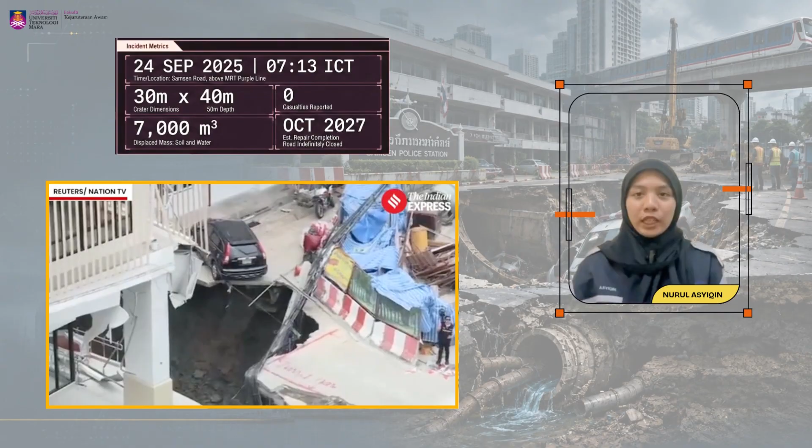Good morning everyone. Today I would like to present about a land subsidence that happened near the MRT Purple Line construction area in Bangkok on 24 September 2025.

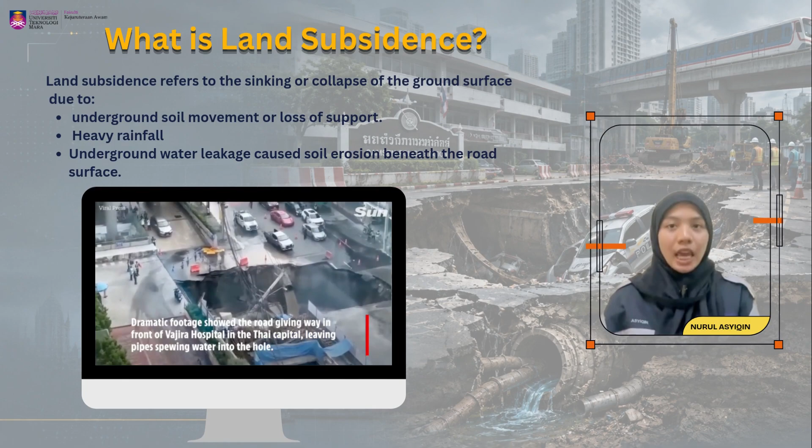Land subsidence refers to the sinking or collapse of the ground surface due to underground soil movement or loss of support. In this case, heavy rainfall and underground water leakage caused soil erosion beneath the road surface.

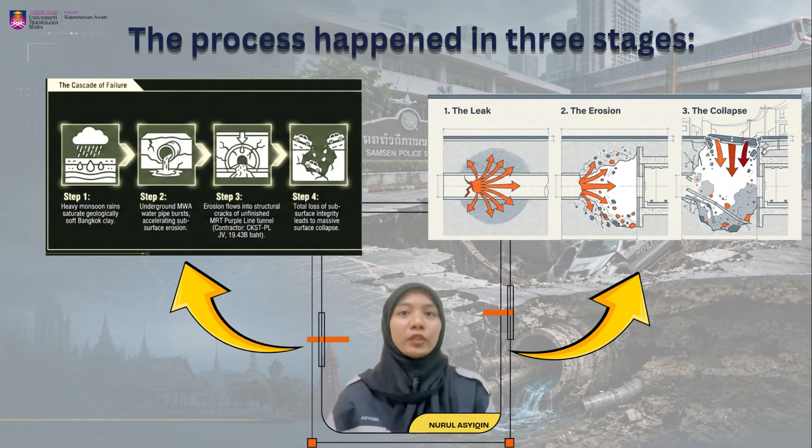This happened in three stages. First, water leaked into the soil. Second, the flowing water slowly washed away soil particles and created an underground void. Finally, the ground could no longer support the load above it, forming a huge sinkhole.

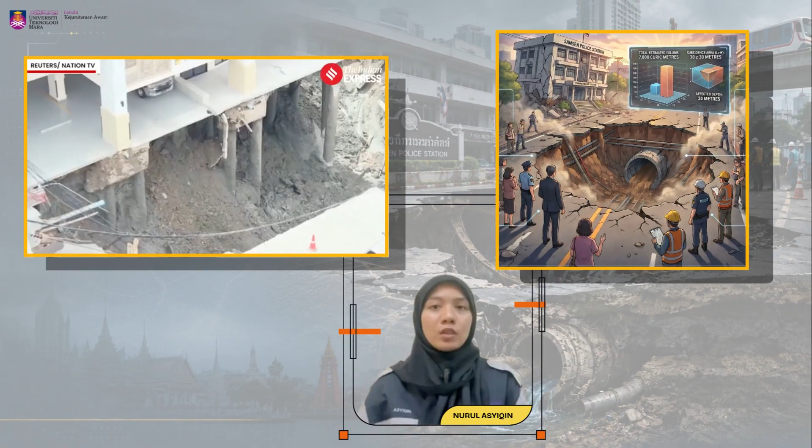The sinkhole was about 30 meters by 40 meters with around 7,000 cubic meters of soil and water, affecting nearby infrastructure including the Samsen Police Station, Vajira Hospital, MRT construction site, nearby roads and utility systems.

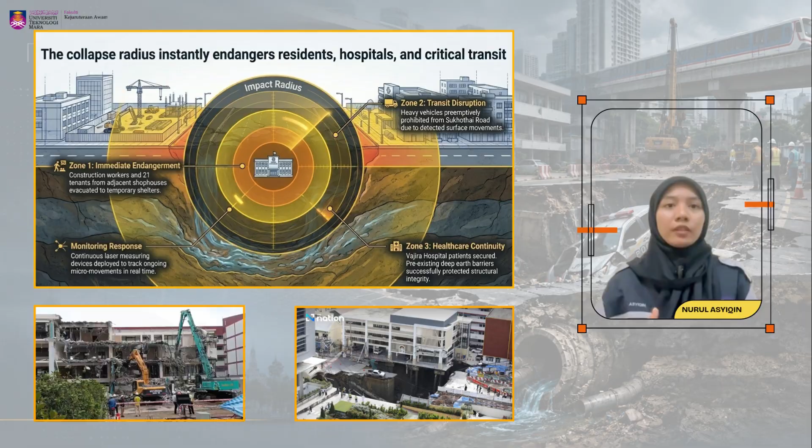Although no casualties were reported, many construction workers, patients and road users were affected indirectly due to the safety risks and road closures. This case shows the importance of proper underground monitoring, drainage systems, and geotechnical investigation to prevent future land subsidence incidents.

I will explain the first major issue related to the land subsidence incident at Samsen Police Station in Bangkok, which is structural instability and infrastructure failure.

The incident created a massive sinkhole measuring approximately 30 by 30 meters and nearly 50 meters deep near the police station and Vajira Hospital. The collapse caused severe damage to roads and underground utilities, police vehicles, and nearby buildings.

Engineers later discovered structural cracks, tilted structures, and damaged foundation piles beneath the police station building. Due to this serious damage, authorities declared the building unsafe and planned for demolition.

This case is considered a complex civil engineering problem because sudden large-scale land subsidence in a dense urban area is difficult to predict and can quickly become dangerous.

The collapse also highlights the challenge of underground construction in weak soil conditions, especially in Bangkok where soft clay soil and groundwater-related subsidence are common issues.

From a safety perspective, the incident endangered numerous residents, road users, hospital patients, and construction workers. Authorities had to close roads, evacuate surrounding areas, and monitor nearby structures to prevent further collapse and injury.

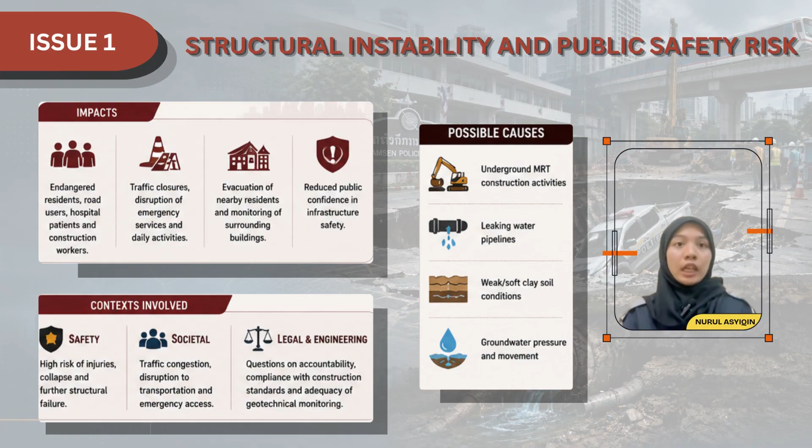From a social perspective, the collapse disrupted transportation, emergency services, and daily public activity in Bangkok. It also raised concerns regarding construction safety, geotechnical monitoring, and whether underground MRT construction activities, leaking pipelines, and groundwater pressure contributed to the failure.

I will explain the second major issue in this case, which is environmental and urban development challenges related to the land subsidence incident at Samsen Police Station in Bangkok.

Investigations suggest that underground MRT construction activities, groundwater pressure, leaking pipelines, and Bangkok's soft clay soil contributed to the subsidence problem. Bangkok already experienced long-term land subsidence due to rapid urbanization and excessive groundwater extraction, making the engineering condition more complex and unstable.

This case demonstrates how large infrastructure projects in weak soil conditions can increase environmental risk if proper geotechnical investigation and monitoring systems are not implemented effectively.

Due to the continuing soil movement, authorities had to carry out emergency stabilization work using sandbags, concrete fillings, and monitoring systems to prevent further collapse and protect nearby infrastructure.

From a health and society perspective, the incident affected nearby communities and hospital operations. Traffic congestion, dust, vibration, noise, and disruption to water and drainage systems caused inconvenience and stress to residents and the public. Some residents also needed temporary relocation for safety reasons.

The incident also raised concerns regarding sustainable urban development in Bangkok. Many people question whether construction projects and underground infrastructure work were properly monitored before the collapse occurred. This situation reduced public confidence in urban planning and infrastructure safety.

Overall, this issue highlights the importance of sustainable urban planning, environmental management, and continuous monitoring during underground construction projects to reduce further risks and ensure safer urban development.

Because the ground keeps sinking, repairs and upgrades are needed again and again, which drives up maintenance costs. This creates long-term economic burdens for the government, business, and communities.

For example, business activities and transport systems get disrupted, infrastructure lifespan becomes shorter, and property values drop. Also, flooding makes the damage worse, affecting public safety, health, and even cultural areas.

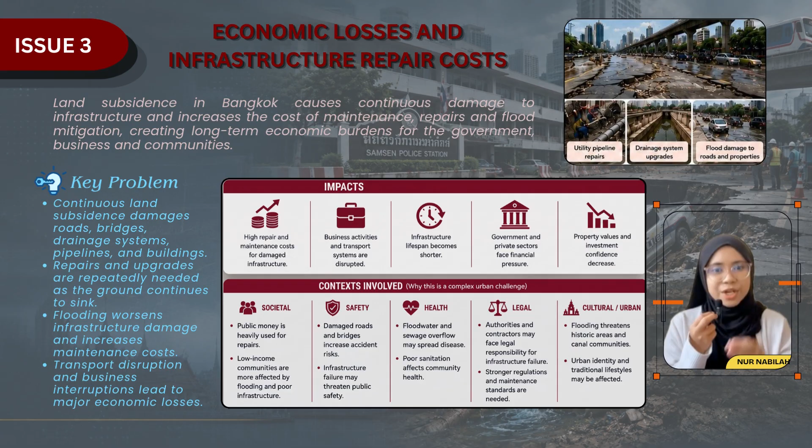So overall, this issue is not just about repairs. It's a complex urban challenge with wide economic and social impacts.

So lastly, for issue 4, we focus on geotechnical and engineering challenges in Bangkok. The fact is, Bangkok sits on thick layers of soft compressible clay. When groundwater is extracted and buildings place heavy loads, the soil compresses and causes long-term settlement.

As shown in the diagram, this process lowers groundwater levels, increases soil pressure, and leads to clay compression and land subsidence. The key problem is that Bangkok's soft marine clay settles easily under pressure. Groundwater extraction worsens this, and differential settlement makes infrastructure design and construction much more difficult. It also creates long-term uncertainty for structure performance and urban development.

This leads to several impacts like buildings may crack or tilt, construction costs increase due to special foundations, settlement is hard to predict, and underground utilities are at risk. Because of this, advanced monitoring and engineering design are required.

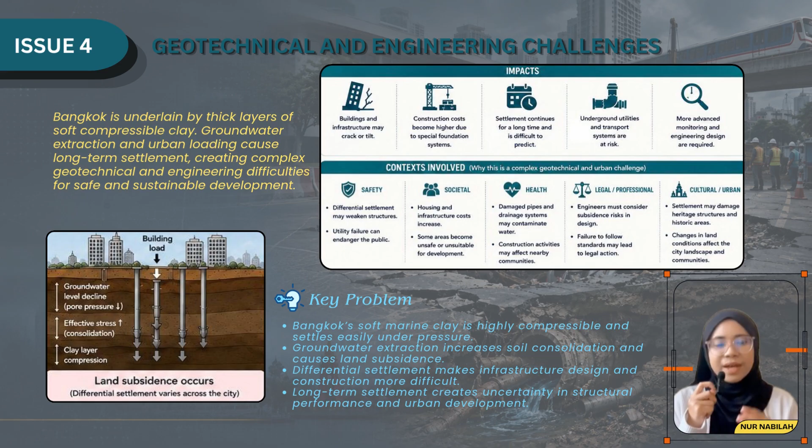Overall, this is a complex challenge involving safety, society, health, legal, and cultural aspects, making safe and sustainable development in Bangkok more difficult.

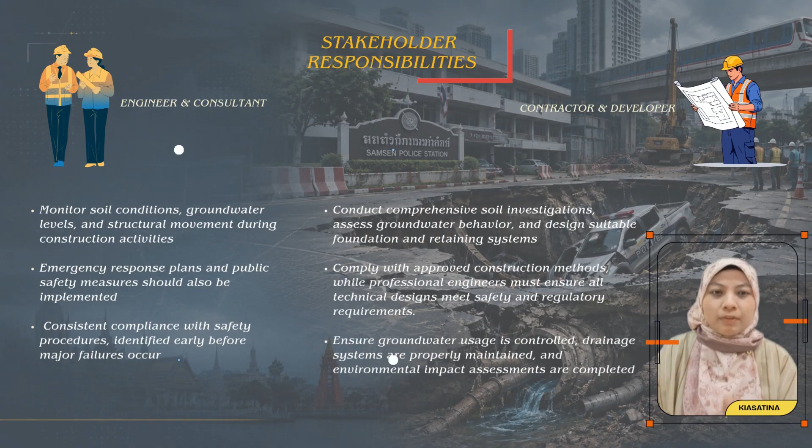Engineers must conduct comprehensive soil investigations, assess groundwater behavior, and design suitable foundation and soil retaining systems. Failure to follow engineering standards during geotechnical work can lead to soil collapse and structural failure. Construction should comply with approved construction methods, while professional engineers must ensure all technical designs meet safety and regulatory requirements. They also need to ensure groundwater usage is controlled, drainage systems are properly maintained, and environmental impact assessments are completed before development projects begin.

Next, government authorities must strictly enforce construction safety regulations, excavation permits, and geotechnical investigation requirements. This includes sustainable urban planning and environmental protection policies, which might help decrease the issues. Government and construction companies should invest in regular inspections, advanced monitoring technology, and proper maintenance systems. Insurance providers, utility companies, and local authorities should also coordinate financial planning and risk management strategies to reduce the long-term economic impact of sinkholes.

The public are advised to report warning signs such as ground cracks or depressions at an early stage to stay alert to future consequences. Also, please cooperate with safety instructions during emergencies to reduce the danger and barriers to development.

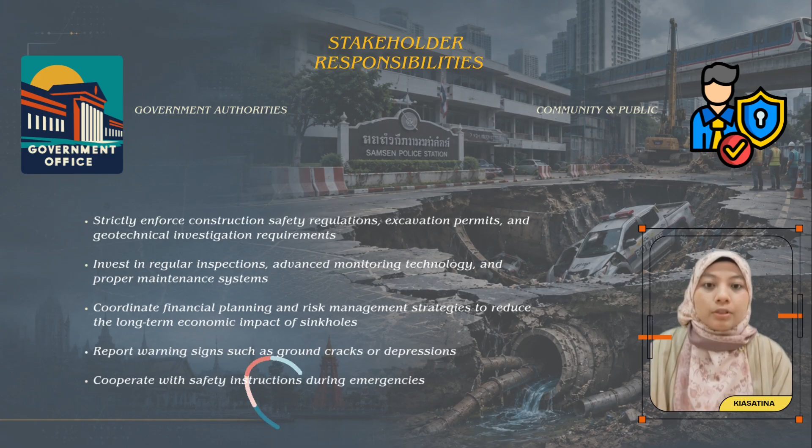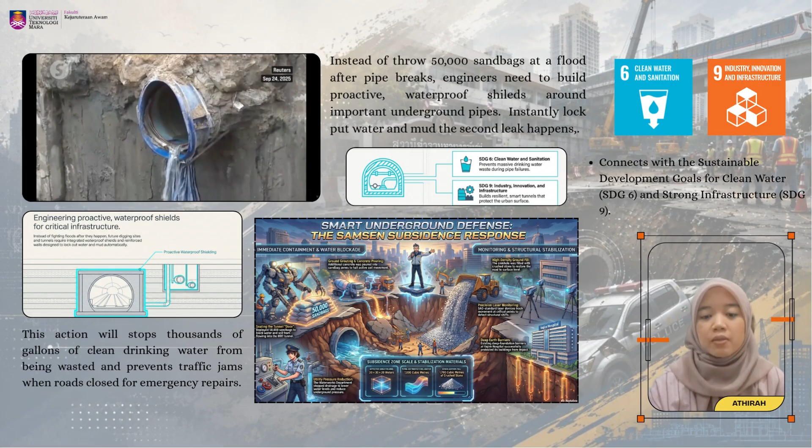The first solution is smart underground water defense. Deep beneath Bangkok, a major water pipe burst. The escaping water washed away the soil supporting the road above, triggering a massive cave-in into an unfinished subway tunnel.

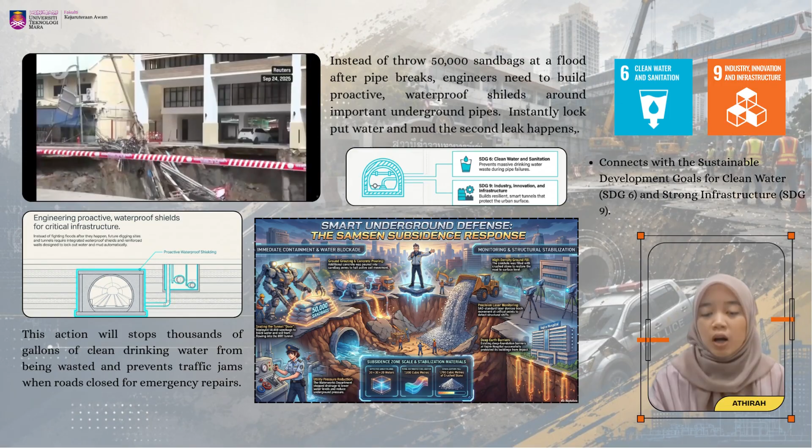The fix: proactive engineering. Instead of reacting with sandbags after a flood, future tunnels need smart, automatic waterproof doors and reinforced shafts. The second a leak is detected, they instantly lock out water and mud. This stops dirt from washing away, preventing dangerous sinkholes. It also saves thousands of gallons of clean drinking water and prevents city-paralyzing traffic jams.

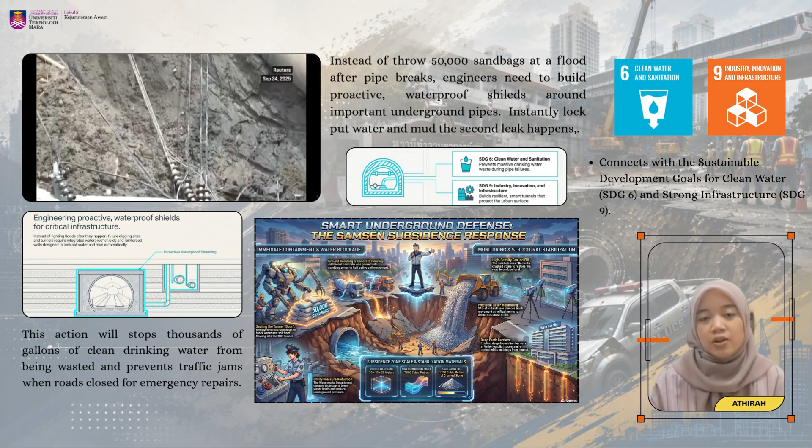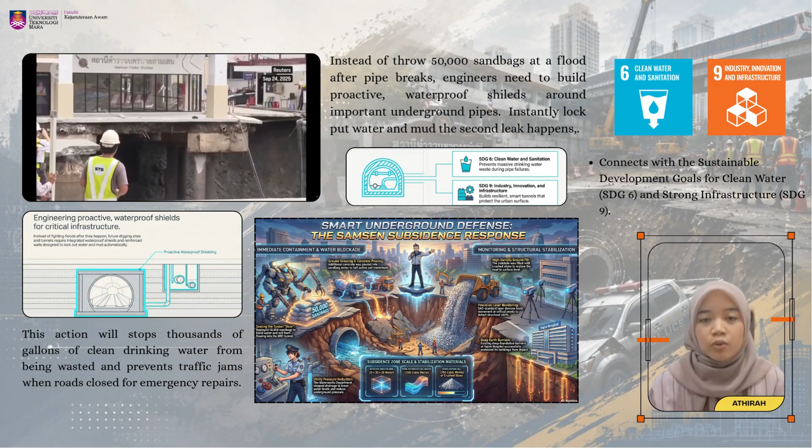City leaders must update building codes to require these safeguards, advancing UN goals for clean water and infrastructure. Stopping uncontrolled water stops the ground from collapsing. It is the single most important step to protect the public.

The second solution is smart traffic and weight control. When a city's ground is already damaged, the weight of heavy traffic can trigger secondary collapse, and poorly planned detours create massive traffic jams and pollution.

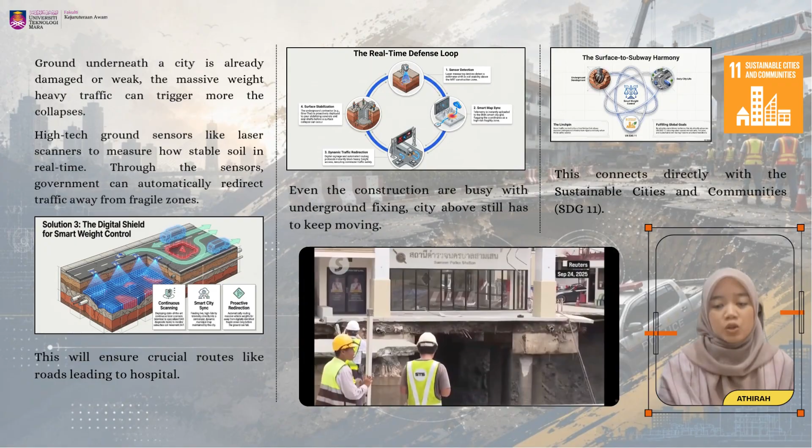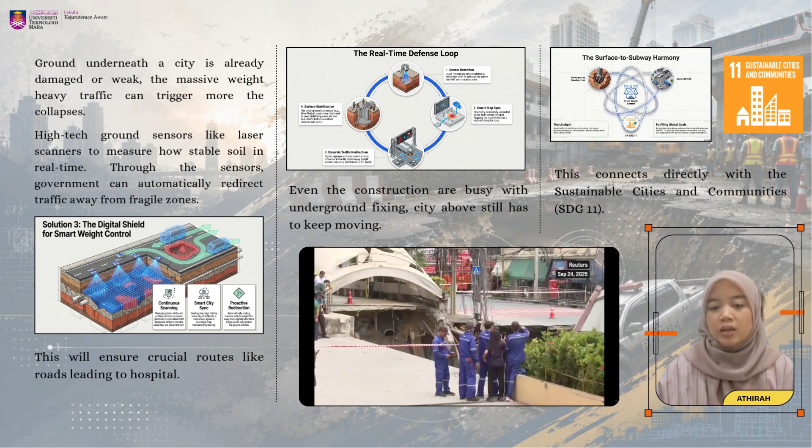The fix: smart weight control. Engineers can use real-time ground sensors and laser scanners to measure soil stability. Connected to a smart city map, this automatically redirects heavy vehicles away from fragile zones. This will prevent further ground damage and cuts air pollution.

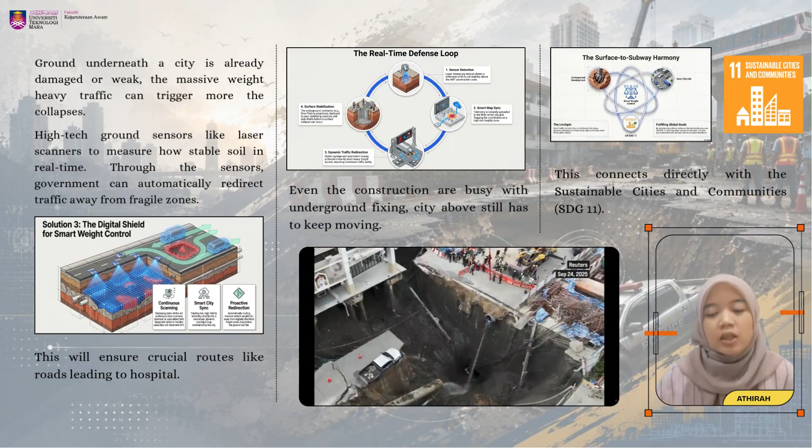Crucially, it keeps essential roads, like roads leading to hospitals, safe and open. This real-time data gives leaders the proof they need to legally ban heavy trucks from risky streets, directly supporting the UN's goal for sustainable cities.

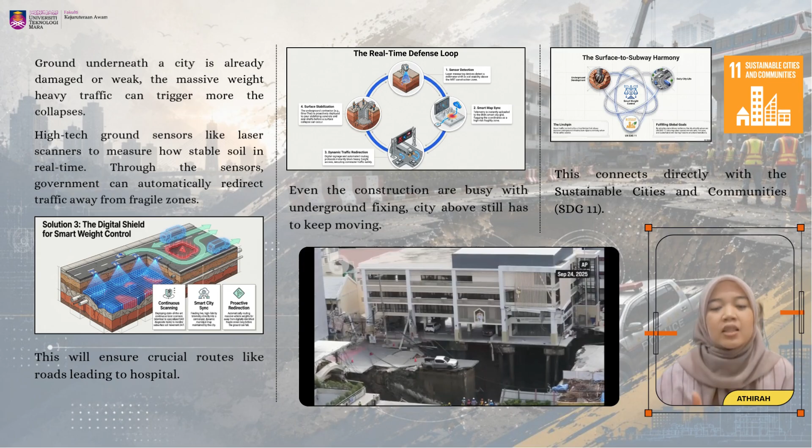While underground crews repair the damage, the city above must keep moving safely. Smart traffic control is a daily necessity to prevent secondary sinkholes.

So the third solution is a sustainable material recovery and deconstruction framework, where the aftermath of the sinkhole requires rapid demolition. Thus, the engineering solution is the Green Urban Deconstruction Framework, which prioritizes controlled dismantling and maximum recycling of the structural materials over rapid demolition, since immediate reaction is required and rapid demolition is very costly and expensive.

This framework prioritizes on-site processing of residual waste and material instead of disposing it to landfills. Using machinery such as mobile crushers, we can process the residual waste into recycled materials such as recycled aggregates. Fully utilizing the materials can also ultimately reduce the cost, as using recycled materials reduces the cost for new raw materials.

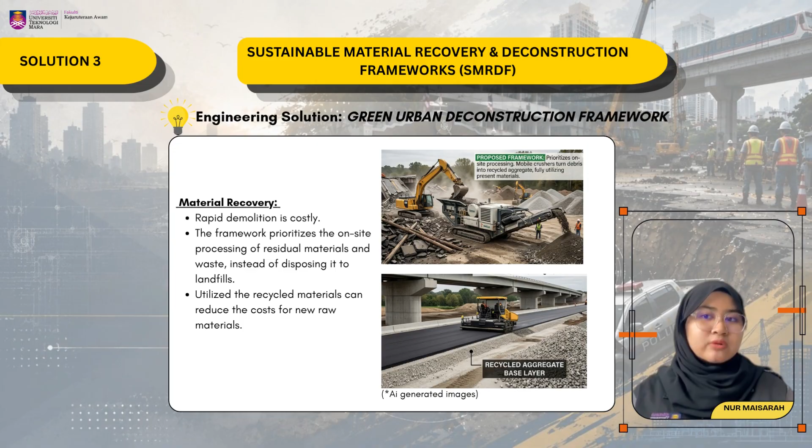So what are the impacts of this solution? To society, it prevents displacement and disruptions of the local community. A research by Akbas and Iyisan in 2025 studied that the benefits of utilizing on-site materials reduce the transportation of new materials and also reduce noise pollution and traffic congestion.

In terms of environmental impact, they have also studied that reusing salvage material as recycled concrete aggregates leads to a reduction in carbon emissions from processing new raw materials. Thus, this reduces environmental impact by minimizing landfill waste and reducing the carbon footprint of processing new materials.

In terms of safety, the deconstruction process is much safer than demolition as it involves controlled dismantling and also uses digital technology. For the MRT Purple Tunnel, the deconstruction requires careful procedures to prevent further structural failure in the tunnel system.

Lastly, in terms of regulatory requirements, we must align with both the local municipal codes and engineering standards, in which the recycled material must be tested first with the Department of Rural Roads (DRR) and Department of Highways (DOH). This is to ensure that the materials have adequate structural quality.

In terms of SDG alignment, this solution is aligned with SDG 12, Responsible Consumption and Production, and also SDG 11, Sustainable Cities and Communities, as we adopt a sustainable solution for materials recycling and integrate it with a deconstruction process.

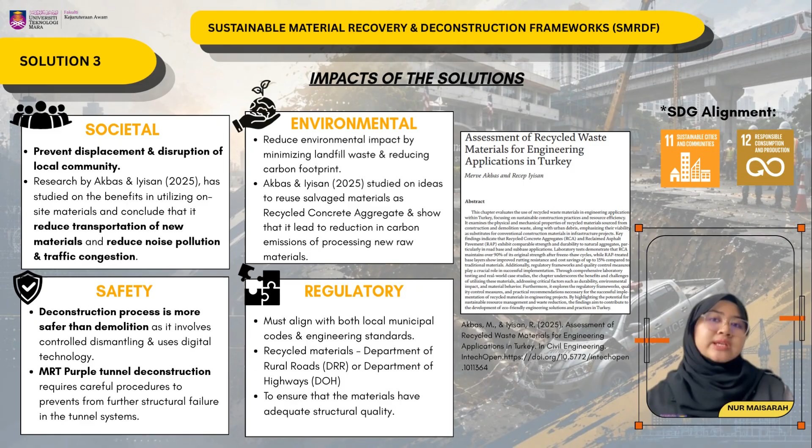So the fourth solution is a ground monitoring framework and integration of advanced soil stabilization. Due to the Bangkok area being underlain by thick layers of soft marine clay, combined with groundwater extraction and urban loading, it leads to long-term consolidation settlement and structural instability.

The engineering solution that we have proposed is real-time monitoring and utilizing advanced soil stabilization techniques such as deep cement mixing and also jet grouting.

Real-time monitoring uses settlement gauges such as inclinometers, geophones, and networks such as InSAR. This is to detect any early potential ground failure and measure ground deformation, subsurface tilting, and ground vibrations. Deep cement mixing is to accelerate the consolidation and increase the shear strength of the soft marine clay before the deconstruction process of the MRT tunnel.

This can be proven by research by Xue in 2024, where they concluded that deep cement mixing is very suitable for large construction sites with soft clay soil and is cost effective in reducing settlement.

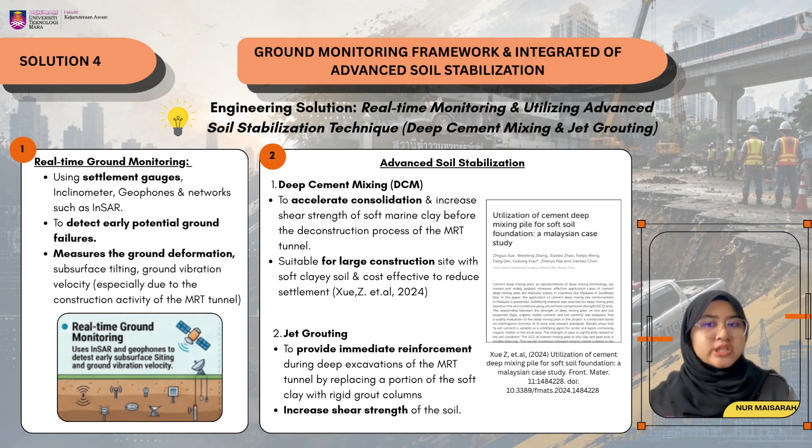For jet grouting, it is to provide immediate reinforcement during deep excavations of the MRT tunnel by replacing a portion of the soft clay with rigid grout columns and increasing the shear strength of the soil.

The impact of this solution to society: it prevents ground failures, avoiding cracks and tilting of buildings, residential buildings, and heritage sites. Thus, it ensures long-term community continuity of the society and surrounding area.

For environmental impact, through ground monitoring it reduces the risk of sewer and pipeline ruptures, hence preventing contamination of both soil and water. Soil stabilization can prevent soil compression and also reduce the rate of settlement.

In terms of safety, advanced geotechnical monitoring and modeling prevents settlement and acts as an early warning system, and for infrastructure protection, ensures the safety of underground utilities, facilities, and transport systems such as the MRT tunnel.

For regulatory requirements, engineers must have a legal and professional duty to adhere to updated subsidence codes such as the Engineering Institute of Thailand (EIT) standard and also the Building Control Act 1979, as this case is in Thailand. This is to avoid any liability for infrastructure failure.

For SDG alignment, adopting advanced technology to solve issues such as ground monitoring and advanced soil stabilization techniques aligns with SDG 9 and SDG 11.